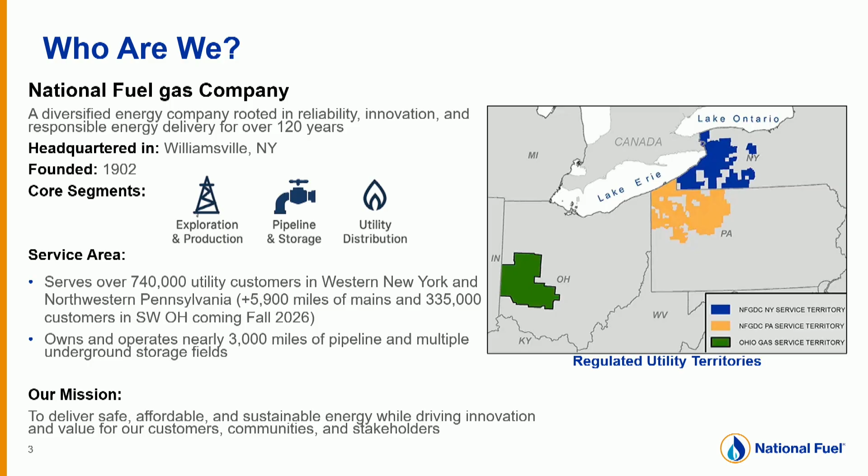Like other utilities in the state, we have also been exploring and developing a UTEN pilot of our own. We're currently a little behind some of the other utilities. That's not because we've been dragging our feet on the issue. We actually had a pilot project up and running in development when they passed the UTEN law. And unfortunately, due to economics, we had to scrap that and sort of pivot to a new project. So that found us a little behind, but we're continuing to make progress there. We're wrapping up our phase 2 design filings and planning our first test bore here, hopefully in the next couple of weeks, which we're excited about.

I've been in a few sessions in the last 2 days that have talked a little bit about our project. Maybe just to summarize, the project really aims to do two things. One is decarbonize an existing district system that serves a few municipal buildings in downtown Buffalo, including City Hall, and then also electrify 12 residential apartment complexes that are nearby. That's part of an affordable housing community. It's a unique project, one that we're really excited about. It leverages two sources of thermal energy: one, waste heat recovery from a 96-year-old brick sewer line that's running nearby, which is a pretty interesting thing, and then we're going to supplement the requirements there with a bore field.

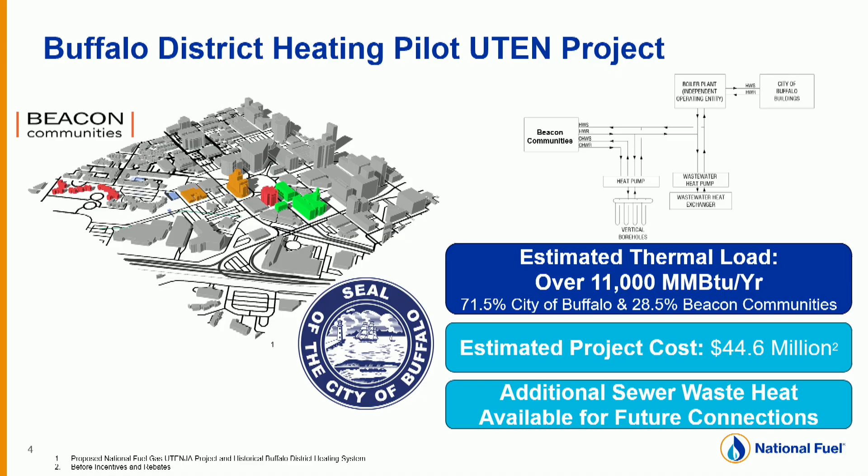One of the great things about this project is from the start, we've had two willing customers, so customer acquisition really wasn't a challenge for us. And that includes the city of Buffalo, and we've had recent turnover in the mayor's office there. We've been continuing to work with his administration, so they've been great. It checks a lot of the boxes that UTENJA had in the proceeding, but I would say that we remain concerned about cost. It's a $44.6 million project serving a limited amount of customers, and so as excited as we are from a technical standpoint, we remain concerned about ratepayer impacts.

So on to maybe our perspective here as we sit 6 years into the climate law. I'll say New York energy policy since the passage of the CLCPA has been pretty fixated on rapid electrification at really any cost. Cost, affordability, reliability have taken a back seat and not been prioritized. And natural gas has largely been viewed as a problem, as an obstacle to meeting our decarbonization goals, versus a tool, a way to get there. And for a while, decarbonization has become an all or nothing proposition. And we like to say letting perfect be the enemy of good. So we think that's been a mistake and a principal reason why the state really hasn't made a lot of progress in meeting its climate goals.

The benefits of natural gas as a part of the energy mix continue to be clear. It's abundant, it's reliable, it's affordable. Up to this point, natural gas has played a key role in the decarbonization of the economy of the United States as a clean energy alternative. It's displaced coal throughout the country, lowering the emissions profile of our electric grid. But I think going forward, if we want actual progress and continued progress in things like building decarbonization, we need to start viewing it as a clean energy enabler. Certainly, from the standpoint of the build-out of renewables, wind, solar, you need something to scale with that build-out. As a gas company, we're not against renewables, but we know that due to the intermittency of those resources, you need something to back that up when it's not available, and you need to scale things like natural gas as you grow renewables.

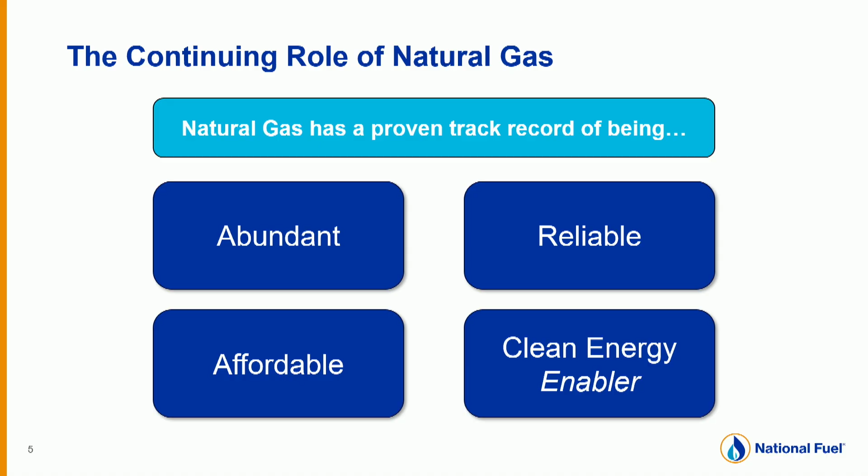But as we think about the focus and the challenge of decarbonization, we need to focus strategically on cost-effective measures, things that you're going to be able to scale in the market, that are going to be attractive to the market. And I think being open to things like hybrid approaches that leverage the positive attributes of natural gas is something that will help us make continued progress.

One option that I don't think we should close ourselves off to in the context of geothermal and UTENs is leveraging natural gas for peak shaving. We think that can significantly reduce the cost, which is a big barrier to scaling UTENs and geothermal. It also reduces the resource requirements and addresses some of the load imbalances.

Our team, oh, thank you. Can I keep the other one? Okay, thanks.

So, our team in this slide shows an example where we modeled a UTEN for 50 new homes in the Buffalo area. And if you build the UTEN to just meet 55% of the peak instead of 100% of the peak, and use gas or something else, this doesn't mean it has to be gas, but something else that's cost effective to handle those peak loads, you can trim the number of boreholes that you need significantly and reduce the capital costs and upfront costs required.

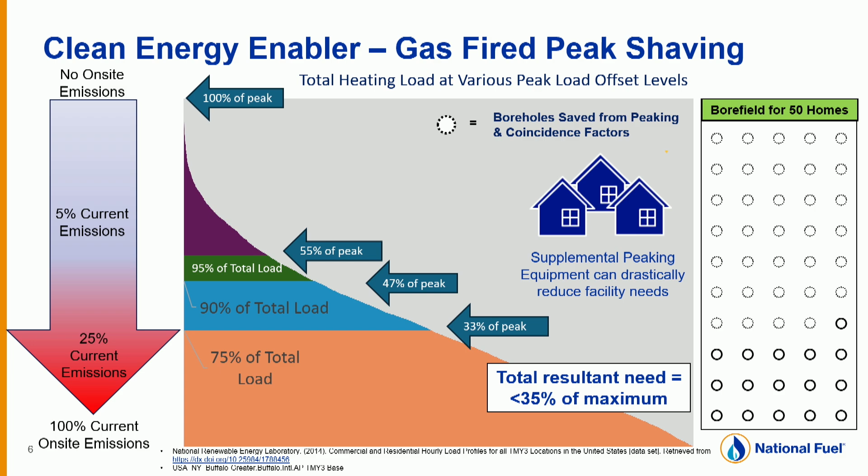And in this case, you're still using the geothermal system to address and capture 95% of the total load. And we think being open to gas in these sorts of arrangements will reduce the cost and make these systems more economically viable. So, as the state looks to implement things like the All Electric Buildings Act, as the state looks to increase the availability of affordable housing supply, we think hybrid approaches like this can deliver on significant emissions reductions in a cost-effective and durable way.

Economically, electrification struggles to compete, and that's been the struggle all along. And it's particularly in Western New York, where natural gas has a significant economic advantage. We've seen residential electric rates increase throughout the state, particularly in Western New York. We've seen them almost double in the last 5 years. Gas is part of that explanation, but the gap between gas and electric, when you put them on par on an energy equivalency basis, is widening.

And so the good news for geothermal, I think, is what we're seeing is this trend is approaching a point where UTENs and geothermal are becoming more and more competitive with air source heat pumps. But the gap between gas hybrids and a traditional gas user remains large, which makes wide-scale adoption of electrification challenging, absent something like a government mandate.

So, just to close here, we think hybrid approaches will help level the playing field. It'll enable electrification to be adopted on a wider scale. And while it may not be perfect, to some it's better than good and can be used to jumpstart progress in a real way.

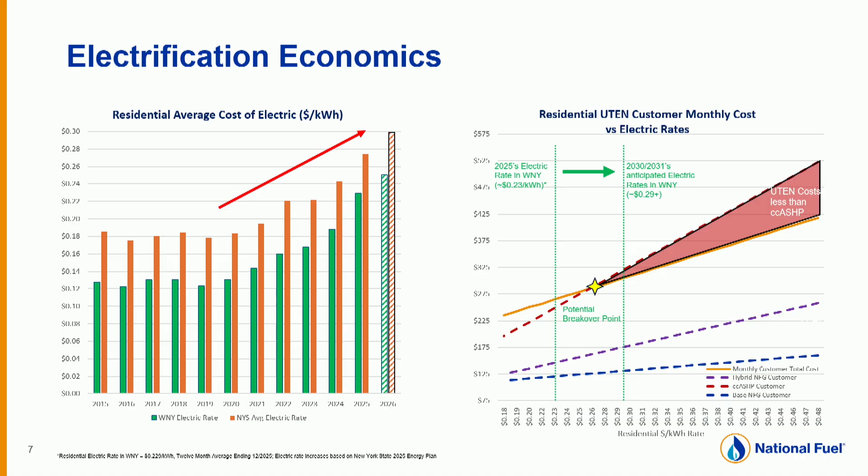Yep. Just keep moving me down there. All right, let's bring up Joe Kessler from NYPA. Thank you, John. Thanks, Brian.

So my name is Joe Kessler. I'm the Executive Vice President and Chief Operating Officer of the New York Power Authority, and this is a very friendly room to me. I see my cohort, the CFO, Adam Barsky, somebody you might have seen speak at the last session, out in the audience. He and I come up with great ideas, and this table right here gets it done. This is a lot of NYPA folks right here, so I appreciate them being here, listening to what we're doing today.

So, talking about practical decarbonization and balancing energy investments and affordability for the New York Power Authority. I know there's an international crowd here. For those who don't know who the New York Power Authority is, we're an instrumentality of the state. We are a separate authority. We do have a separate board. They are nominated by our governor and confirmed by the Senate, so there is a government tie to it. But we do operate as an independent utility as much as many of the investor-owned utilities.

And we have the fortunate advantage of having a mission and a vision that allows us to look long-term, to have kind of a multiple bottom line approach, not necessarily beholden to investors, but really focused on ratepayers and other stakeholders in the state. So our mission is to lead this transition to a carbon-free economy in an economic way that benefits everybody. We also have a unique position in that not only do we execute on behalf of the state the missions derived by the government, but we also have a seat at the table to inform them about technologies that may advance those goals in a more practical way.

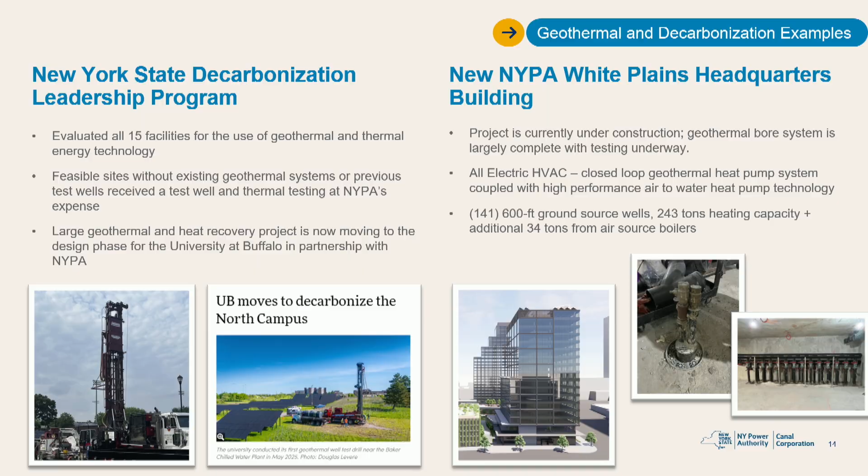It won't be on this slide here, and I'll move on because I know we're going to have a lot of questions too. But we are also working on the Empire State Plaza as well. That's a multi-phase project that's down the road, but a lot of feasibility work in the Albany area as well on what we're going to do there at that campus. So that's what I have for today.

Looks like we'll have to have NYPA back in Saratoga next year. Want an update on that? All right, let's bring Rachel Carpitella up, talk about what Wendel's thinking.

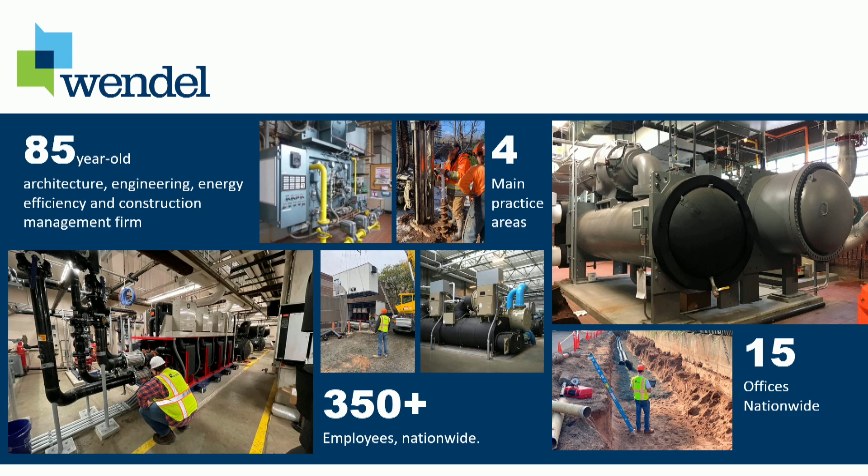One of the biggest challenges our clients face is balancing long-term carbon goals with very real short-term budget constraints. Public sector and institutional facilities are dealing with aging infrastructure, deferred maintenance, and competing capital needs. As a result, even organizations with strong climate commitments often hesitate to act because they lack cost certainty, they lack a clear sequence of work, and they are wary of taking on financial or operational risk.

We also see something I call perfect plan paralysis. The idea that you have to design the entire end state system before starting any work. That mindset delays action and increases costs over time. Our experience is that decarbonization becomes feasible when we shift away from all-at-once thinking toward a planned, phased approach that aligns with capital cycles and reduces risk at every step.

A phased approach breaks decarbonization into manageable, fundable steps. Phase 1 focuses on high-impact efficiency and enabling infrastructure. These are activities such as controls improvements, lighting, thermal load reduction, and upgrades that prepare the facility for future heat pump or geothermal systems. This phase almost always generates savings and can often be self-funded.

Phase 2 is where conversion occurs. Electrification of heating and cooling through geothermal, air source heat pumps, or hybrid configurations, along with the necessary distribution and controls work. By this point, the loads are lower, the systems are right-sized, and the investment is more affordable. Phase 3 focuses on optimization and renewables once the core systems are in place.

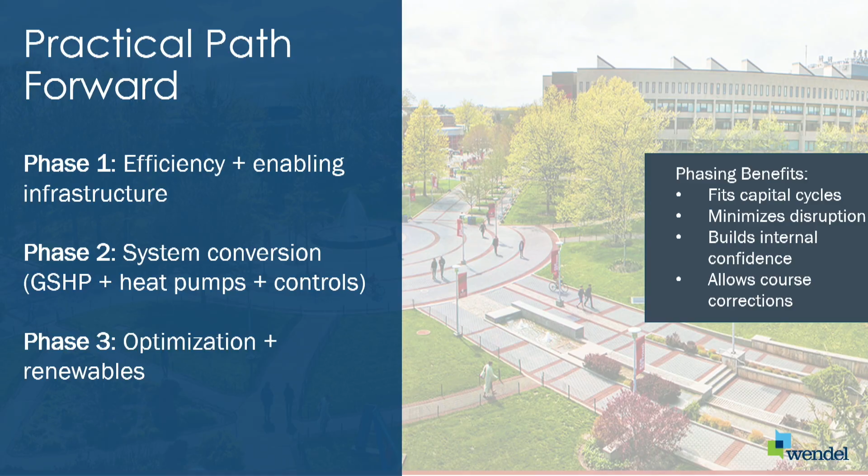The benefits of the sequencing are significant. It aligns with available capital. It reduces operational disruption. It allows owners to build confidence as they progress, and it ensures that each step informs the next. This creates a practical, affordable path toward low-carbon buildings while maintaining reliability and fiscal responsibility.

I'm going to move quickly through the next slides. What you're seeing is not a list of solutions. It's a strategic plan building in layers. Each step adds complexity and capability, starting with energy efficiency, then energy recovery, then alternative fuel transportation, and eventually a critical review of infrastructure like steam systems. The key point is that decarbonization doesn't start with geothermal or heat pumps. It starts by deliberately preparing the system so that those investments make sense later.

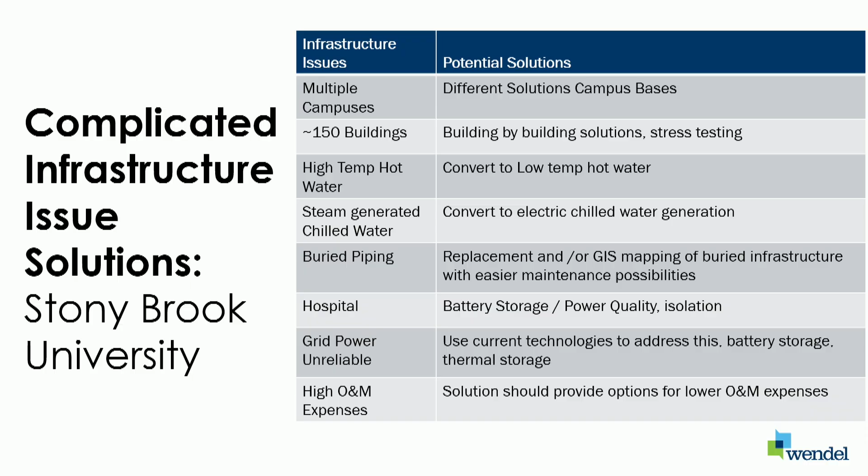This slide shows where that layered strategy runs into real-world conditions. This was part of the Decarbonization Leadership Program that Joe talked about earlier. On campuses like this Stony Brook University example, with about 150 buildings, legacy steam systems, buried infrastructure, and critical facilities, there's no single decarbonization solution that works everywhere at once. This is why phasing is essential. It allows owners to sequence solutions, manage risk, and address infrastructure step by step instead of trying to solve everything simultaneously.

As the strategy continues to evolve, thermal energy becomes part of the conversation. This is an important transition point because space heating and hot water are typically the largest sources of emissions on campuses and in municipal facilities. And addressing thermal loads effectively requires that earlier efficiency and infrastructure work is already underway.

As thermal energy enters the strategy, the next question becomes whether geothermal is even viable at scale. Under New York's Decarbonization Leadership Program, under NYPA's leadership, we led the DLP test borehole investigations across 11 campuses, including higher education, correctional facilities, and healthcare environments. The purpose of this phase was not system design, it was risk reduction. These investigations provided real subsurface data to confirm feasibility, inform future system sizing, and give owners confidence before committing capital.

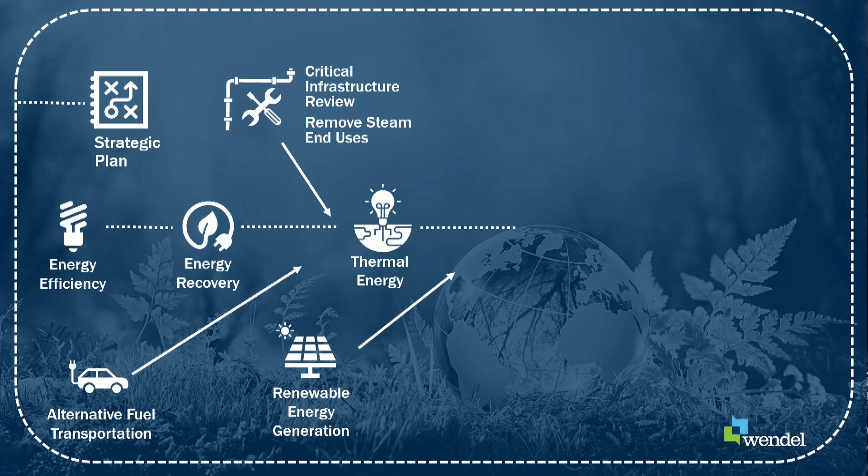Once thermal resources are understood, the focus shifts into implementation, integrating geothermal and other thermal systems along with efficiency and renewables. As thermal systems are electrified, grid capacity and rate impacts have to be addressed deliberately as part of the phased rollout.

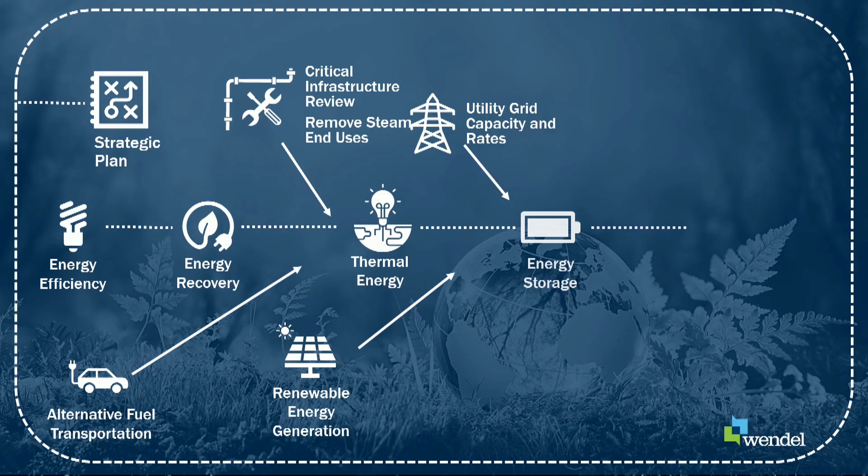Energy storage, both thermal and electrical, supports implementation by managing peak demand, costs, and operational resilience. At this stage, operations and maintenance considerations are built into system designs, so new thermal assets remain reliable and manageable long-term. Phasing also allows emerging technologies to be incorporated where they add value, rather than forcing early adoption.

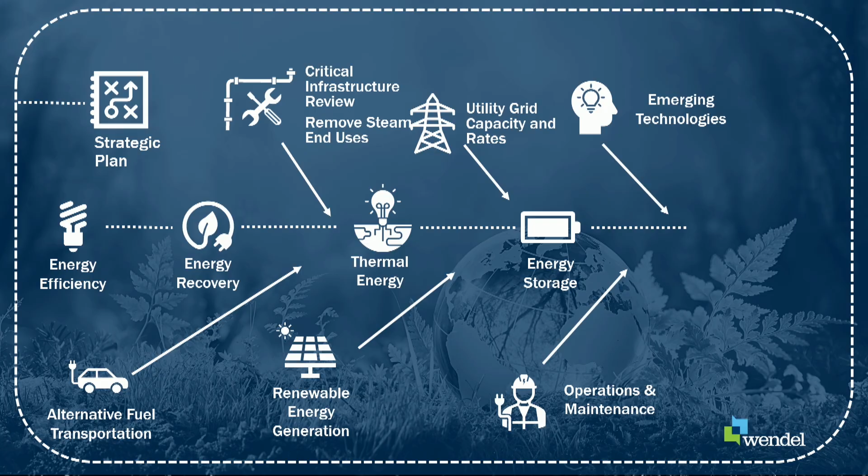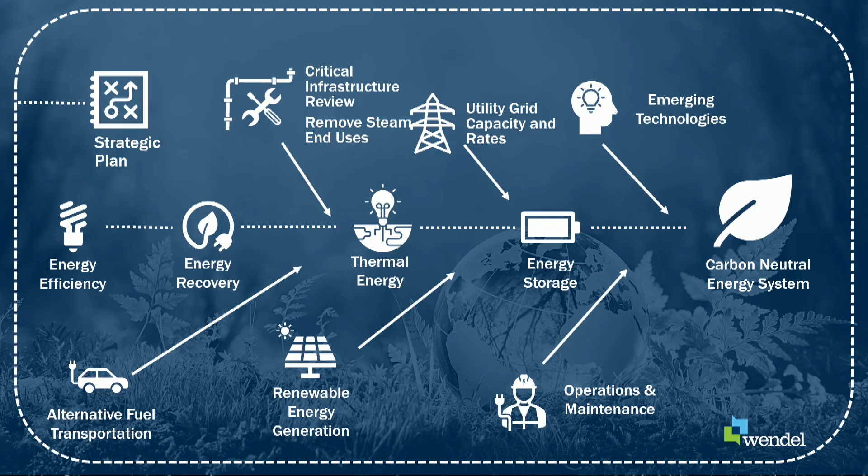By this point, decarbonization is no longer theoretical. Thermal systems are implemented, supporting infrastructure is in place, and the owner is operating within a coordinated, phased path toward a carbon-neutral energy system. Energy performance contracts strengthen phased decarbonization by reducing financial and operational risk.

An EPC guarantees the energy performance of the improvements. That means owners receive cost certainty, they know the savings will be delivered, and the work is completed through a single accountable delivery model. This structure solves two major barriers. First, the uncertainty around performance. Second, the challenge of timing investments.

Because EPCs allow owners to leverage future savings to help pay for near-term upgrades that otherwise might be deferred, items such as distribution improvements, load reduction, and controls upgrades that pave the way for geothermal and electrification. When combined, EPCs and phased implementation create a clear, financeable, and lower risk path from planning to execution. This delivery model is what allows owners to say yes earlier, rather than waiting for the perfect, fully funded solution to appear. I'll briefly share a real example that brings together phasing, geothermal, and the EPC delivery model.

This is a student life geothermal project at a higher education campus in Ohio. What makes it relevant is not just the technology, but how the project was sequenced and financed to make electrification feasible within the institution's constraints. This project followed the same practical decarbonization model that I've been describing, phased implementation with risk managed through an energy performance contract. Before this geothermal system was implemented, the owner focused on groundwork, reducing loads, planning distribution upgrades, and ensuring systems would be compatible with low temperature operation.

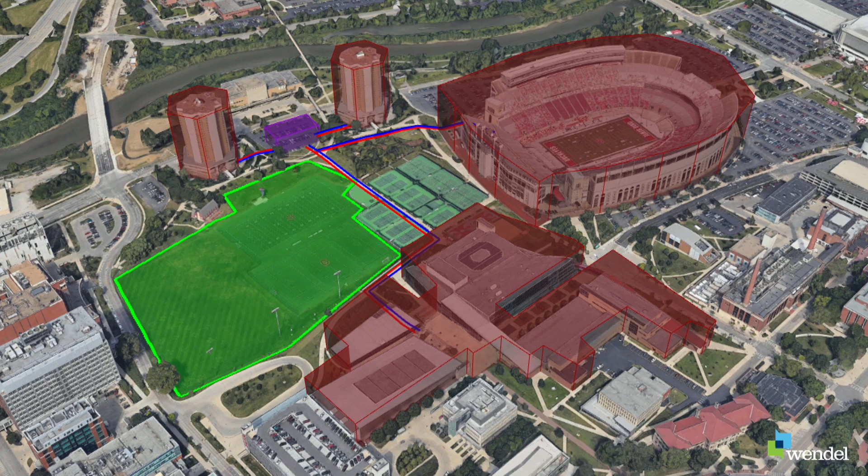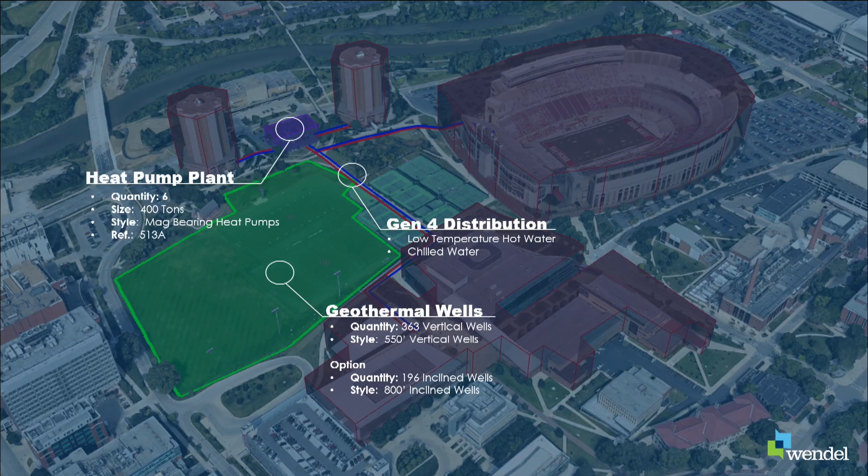In phase 2, the campus implemented a centralized geothermal heat pump plant supported by fourth-generation low-temperature distribution. The well field includes several hundred vertical boreholes, and the plant consists of 6 magnetic-bearing heat pumps serving student life facilities. The key point is not the exact quantities. It's that the system was designed to serve existing buildings while allowing future connections as additional phases move forward. Because earlier efficiency planning work had already reduced demand, the geothermal system could be sized more affordably and operate more efficiently.

The takeaway is this: geothermal became feasible not because the institution accepted more risk, but because the project was phased, right-sized, and delivered through a model that de-risked the investment. This is what makes decarbonization practical and scalable for campuses, municipalities, and other institutions.

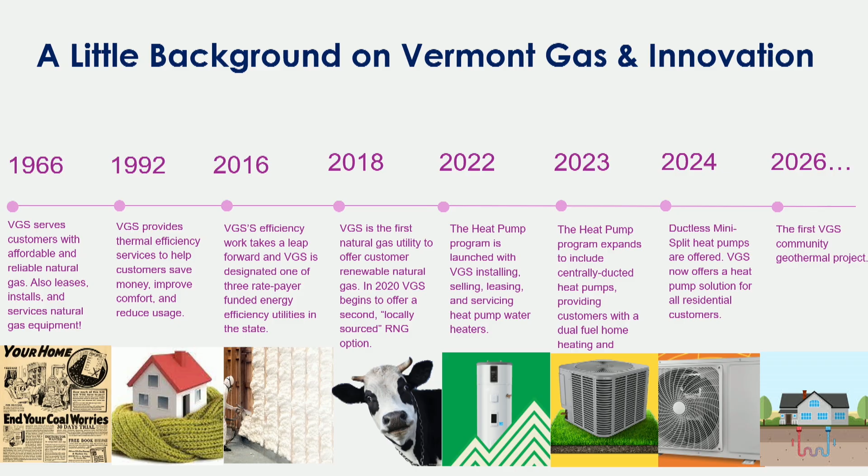In 2020, our climate plan was based on three founding principles. Energy efficiency, which we've been doing since 1992, right? Help our customers use less energy, less gas. Then in 2018, we began to invest in renewable natural gas, and we have two projects in Vermont based on dairy farms, which capture that methane and inject it into our pipeline. So that's the second tier. So it's demand side and then supply side. And the third thing, the kind of weird thing we're doing, because a lot of gas utilities are doing demand side and supply side, is that we're involved in new business models. We're looking for ways to diversify our business.

So a little context about where we are in Vermont. Vermont has a reputation for a lot of things, including progressive energy policy. In 2020, the same time we put out our climate plan, Vermont committed to the Global Warming Solutions Act. Not only did the legislature pass that commitment, but they also gave citizens or entities the authority to sue the state if we are not hitting our goals along the path. A fairly radical proposal, controversial as well, but it passed a highly Democratic legislature that was basically saying we have to get serious about climate. Climate was of top concern back then. Today climate is way down on the list of concerns, right? We've been swept up by that affordability piece.

Another thing that's happened since 2020 is that the two largest communities we serve, Burlington and South Burlington, both have restrictions on natural gas in new construction. South Burlington is a very suburban community, and when you're building a new building, you have to have renewable heating that can meet 85% of the design day load. For the engineers in the room, that basically means you're going to be putting all electric heating in the home. So that's highly restrictive. Those are our two largest communities and some of the greatest growth we're seeing in new construction. That's a serious shot across the bow for natural gas.

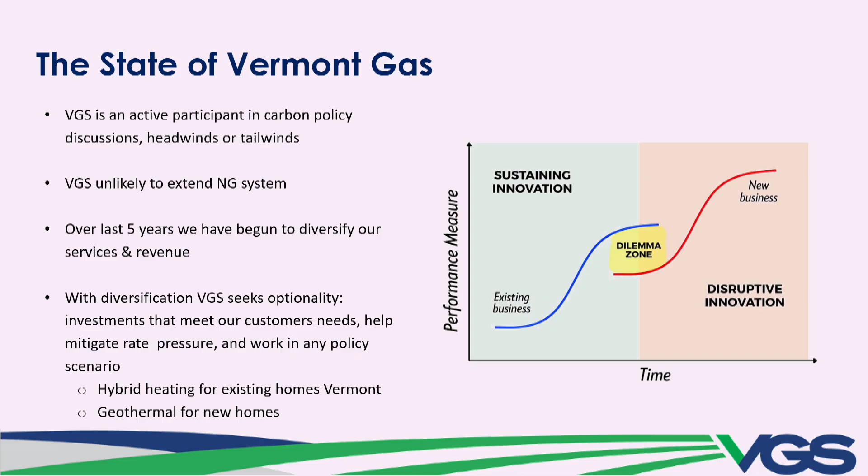Well done, sir. Look at that. I love my panel. Thanks, Matt. Give that back to its owner. Thank you. You're smart enough. You're the brain of our operation. We fixed that, though, you see? See, I know I'm hypocritical. I'm texting, but I'm texting to get his name changed and where are the microphones and how come we don't have cups up here? So I'm still sort of in the room.